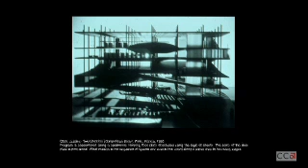So this is a series of speculations about the ways in which sheets open up disciplinary research that's both organizational and cosmetic. Sheets avoid the solid logics typically associated with mass. Unlike surfaces, sheets need not conform to the organizational constraints of a solid.

Figure-ground relationships emerge from solid logics, while sheets distribute events across a field rather than adjacent to or across a threshold. So I have two figures here. One is the Jussieu Library competition by OMA, where programs are distributed using the logic of sheets, and an interior kind of urban environment is made.

The edge of the floor plate in this case is provisional. What matters instead is the sequence of events that unroll along the sheet's length.

This is in contrast to their competition entry from '89 for the Très Grande Bibliothèque, where the entire mass of the project is understood as a solid. Quite literally, it's a series of stacks, and the programmatic elements are carved figures that produce voids that float in the stacks. Sheet logics unseat figure-ground as the chief organizing principle of planning and massing.

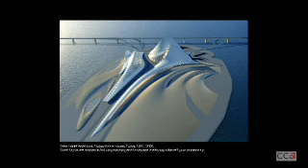Figuration emerges across a field and at scales both small and large. Figure-figure and ground-ground relationships are possible. Here's an early rendering of the Dubai Opera House by Zaha Hadid.

The fundamental design concerns of massing are part of early sheet production rather than emerging from the conventions of material assembly. So formal questions associated with massing require novel approaches. That means the relationship of a mass to the ground, its terminations, its corner conditions, etc.

These tropes have been developed for solid logics, and they provide insufficient solutions to questions of how a sheet might meet the sky, meet the ground, etc. Other questions of sheet description—at apertures, changes in orientation, or changes in material—are also left unanswered by convention.

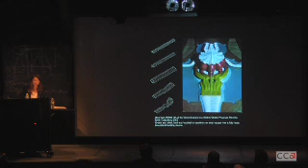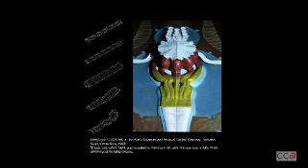This is a project by Greg Lynn, Ark of the World Museum, where he uses a series of sheets that are rolled up to produce a variety of spatial types—sort of covered exterior space rendered as canopy, niche-like space that produces a series of peripheral galleries, as well as the entire building mass.

Minor operations have major formal repercussions. The ease with which operations produce sheet behavior allows the study of versions. Versions are related families of design work that allow differences and similarities of each operation to be evaluated and built upon.

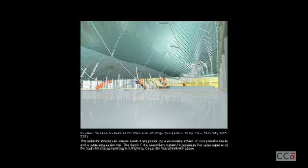Sheets require tectonic inventiveness. This is an old Gnuform project for the Queens Museum of Art expansion strategy. So sheets, rather than developing a spatial diagram with a tectonic solution, basically distribute material in space, and the tectonics have to be evaluated on a local scale.

Rather than producing abstract ordered fields of geometry that downplay materiality, sheets provide form-active tectonic potential without reducing the solution to a single structural system. This allows secondary systems to step in as sheets require them.

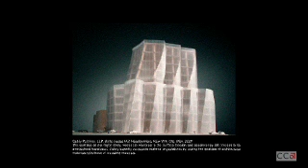Sheets confound material expectations. They imbue surfaces with material qualities rarely associated with architectural production. Surfaces are rendered material rather than abstract. Sheets exhibit posture, which results from their material behaviors. Sheets may drape, recline, billow, etc., depending on their weight and material properties.

This is an example of a model by Gehry Partners. The IAC headquarters was modeled in a series of materials—this one is mylar; there were mirrored mylar studies. You can see in later translations of the architectural model to the physical construction the way in which qualities from the model migrate into the full-scale product.

Sheets encourage the commingling of the representational and the material. Sheets are the primary site of digital description. They operate as the backgrounds of drawings, the primary visual material in three-dimensional modelers, and the products of numerically controlled machines. The commingling of the representational and the material allows the synthetic to alter the real.

When digital information inhabits physical environments, the mixture can produce a new set of synthetic qualities. This is the actual translation of that earlier Mylar model in the IAC building in New York.

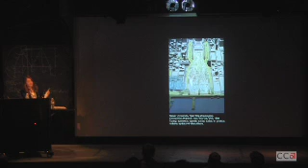Scissors can have their way with sheets. This is Reiser Umemoto's West Side competition, where sheets were manipulated using cutting operations at a variety of scales. At fine scales, cutting alters sheet materiality using techniques like perforation and striation. At medium scales, cutting manipulates profile and silhouette, and at large scales, cutting produces particular sheet boundaries that deal with urban or local site conditions.

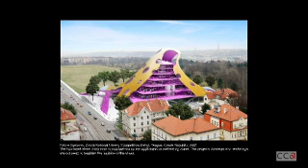Sheets are sided. This is a competition entry by Future Systems for the Czech National Library. Unlike solids that are conceptualized as of the same medium throughout, sheets have sides. This sidedness may be exploited to condition different atmospheres around it. This is often choreographed by the application of graphic material.

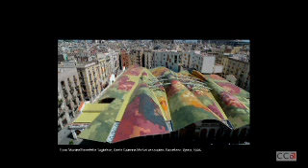Graphic material readily adheres to sheets. Cosmetic effects are possible when deploying sheet logics. Graphic material, including color, texture, pattern, and imagery, is easily introduced to sheets using a variety of technologies.

Sheets expand the expressive and performative capacity of seams. Rather than reluctantly accepting seams as a byproduct of assembly constraints, sheets foreground the capacity of seams to perform at larger scales. Seams can radically alter silhouette using techniques borrowed from something like garment construction, which I'll talk about a little bit later. Seams can tightly tailor sheets with careful pattern making techniques or expand them using additional inserted material. Seams therefore manage and distribute surface area in highly particular and controlled ways.

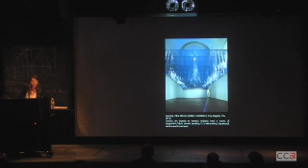So now I'm going to show you a few projects, both from practice and teaching, which have been working within this framework of sheet logics to greater and lesser degrees. We'll start with practice.

So this is a project I'm going to show you, a project that's under construction in Malibu. It's called the Vortex House.

The site is 1,000 feet above the PCH with 200-degree views of the ocean, and it's being developed as a rebuild project, a disaster rebuild project. So the site is extraordinarily difficult to economically develop at this time, but there was a house on the site previously.

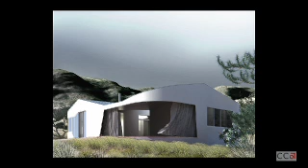The project is a 5-sided mass that's developed underneath a sculptural roof plane. So the sheet in this case is the plane of the roof that you see, the center of which is a courtyard. And to the south, which is down, is the 200-degree view of the ocean.

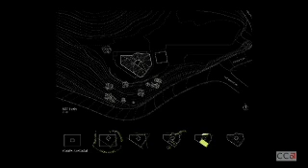To the north is the continued rise in topography to the ridgeline. So the project's ambition lies in its dramatic spatial modulation and the saturation of its interior with the visual and geometric material of the surrounding site, rather than understanding the views as a way to release the interior to the exterior. The surrounding geometric and topographic features are drawn into the interior to condition its atmosphere.

Artificial and natural geometries are characterized as of the same fluid medium, and the house a vortex into which the material is drawn.

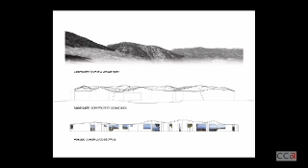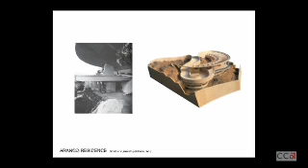In the Arango house, you arrive at the top level. There's an exterior entertaining terrace on the upper level, and underneath that terrace, the private quarters of the house are kind of nestled into the house. So the view is captured through a canopy above, and the living space, the formal conditioned living space, is underneath. And the house basically produces a picture window, a panoramic picture window of the coastline.

In this project, there's actually a desire to fuse the space of the Arango canopy and the private spaces into one environment.

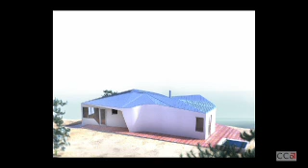So you can see here, this is a view from the northeast, kind of above. This is a false digital rendering. The ocean's not nearly as close.

You enter along the upper right of the screen, and there's one place where the roof extends beyond the perimeter of the house, and you move into the house underneath the sculptural roof plane. Every room is given at least 2 faces of exposure to the surrounding landscape, which means that every room feels a little bit like a pavilion underneath the canopy and set into the landscape.

And then to the south here is a covered patio, which is permissible space. It extends the living space, and it's a kind of inclusion in the overall mass of the project.

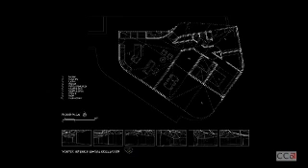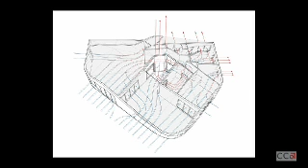There are many ways in which the courtyard works to kind of act literally as a vortex. There's a lot of natural daylighting or natural ventilation strategies which are illustrated here, but the courtyard also does a lot to produce more views of the landscape beyond than just that which you can capture on the exterior envelope. So these are some of the exterior envelope views.

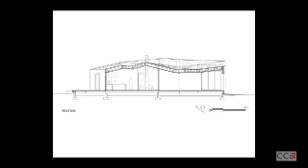And this is a section which shows the way in which the space on the interior is open to the plane of the roof. So the ceilings are always moving to meet the roof, and every room has kind of multiple focus points and also a variable ceiling height.

And all of this is achieved by basically a hybrid steel frame and timber construction, so that all of the dead load of the house is taken through the steel frame, and all of the shear is managed by the wood framing.

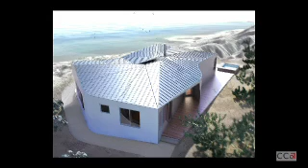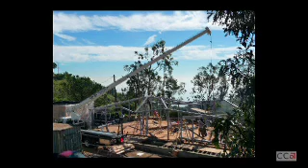So I'm just going to go through quickly to show you some of the construction images. We're just about 2 months from the completion of construction. I have a series of sort of ratty images of the construction site, but you can get a sense of the environment in which the house is located.

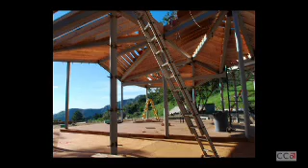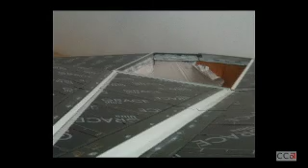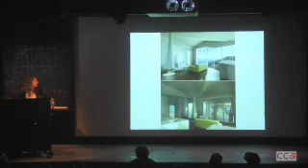This is one of the views that kind of looks like an interior rendering on the top there. And this is the ceiling plane coming together. You can see it extending out into the patio.

And there's one location here where the geometry of the sheet is not idealized for the distribution of load to the perimeter of the building. And so there's this one beam that kind of slips out underneath the ceiling plane and basically transfers load that accumulates at this high point above the living room.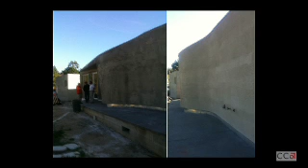And right now, this is the kind of pre-finish coat for the stucco. The roof is zinc. A lot of the edges are really crisp and sharp. And the roof is managing rainwater. It's also dealing with the structural load, and then it's rising and falling to manipulate the space on the interior.

So in terms of what the courtyard does, once you walk in, you have a view toward the courtyard, and you can see through the courtyard out into the ocean. And then when you turn back around, you walk to the bedrooms in the house, and you move around the courtyard. So this is a very tiny house, so the spaces of the house are not nearly as compressed because you have a series of views to the landscape through that courtyard.

And then when you arrive at the master bedroom, then you have another view of the ocean and a view back to the living room to the right.

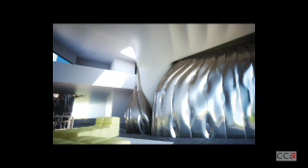The next house I want to show, which will go more quickly than that one, is called the Succulent House. This house was designed as a design proposition for a book called Making a Case, recently published by 306090, and the editors asked a series of architects to produce a design project or writing responding to a contemporary crisis in the American house or American housing.

Our proposal addressed what we called the crisis of identity, and we made the following argument.

The contemporary American house is experiencing a deepening crisis of identity in this era of growing environmentalism. This identity crisis began nearly 50 years ago with the end of the case study house program and the rapid acceleration of suburbanization. The discipline of architecture never regained its footing in the context of American housing, as housing became a product subject to the efficiencies and economics of mass manufacture.

The impact of suburban sprawl on energy, water, and transportation infrastructure was largely overlooked until its geographic consequences were firmly in place. The widespread growth of environmentalism has done little to assert a new identity for the American house.

Whether produced individually or en masse, the American house remains a mixture of old forms, updated equipment, and engineered building products that mimic long-abandoned methods of construction and long-discarded lifestyles. This critique applies as much to the tract home as to the dwell-modern, mid-century remix. Neither solution comprehensively addresses changing societal values or contributes significantly to contemporary design culture.

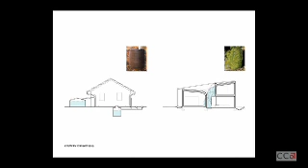We believe growing environmentalism should be met with design ingenuity, not product specification. A lasting contribution to sustainable development or the discipline is impossible when underperforming architectural and urban organizations are simply reproduced using green-branded products. So our proposal addresses the pressing global issue of fresh water quality and supply as but one possible force to drive design ingenuity and improve environmental performance.

Ultimately, this approach allows us to speculate on the organizational, spatial, and atmospheric potential of water collection on the American house. It was our hope that by doing analysis of rainwater cycles, gray water potential, and the storage of water for use in gray water systems, we would be able to produce a prototypical house that could be reworked in different climates in America.

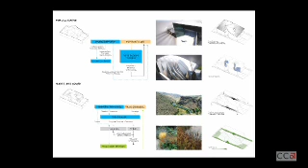Ultimately, we only did one. We collected a lot of data, but we designed one project for LA, and the house is what you'll see now, called the Succulent House. It's sited on a prototypical urban parcel of 50 by 110 feet. This is a common lot size in LA and in other cities, especially in the inner beltways.

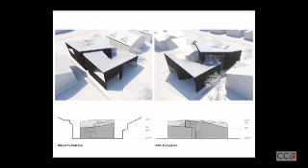We selected this site because we anticipate continuing trends toward inner beltway reurbanization. Organizationally, the roof area of the house is divided in two, and its area maximized for water collection, storage, and distribution.

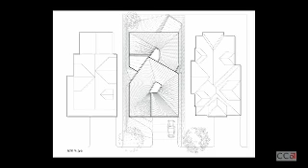The roof planes are inverted, and they collect water at their centers. The program of the house is distributed around those cores. In the back, we have a winter garden, which is adjacent to a master bedroom and kitchen.

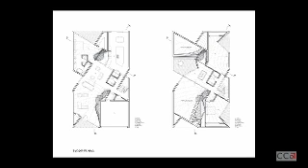In the front, at the living room and family room, we have rainwater storage bladders that are wrapped by a bedroom above and living space below. This is what these look like in section.

The bladders are heat-welded vinyl bladders, which expand as water is stored. So when you have rainwater, like its namesake plant, the bladders exhibit succulence in times of increased water supply. In times of low supply, the bladders are loose and drapery-like.

These are some of the images of the interior.

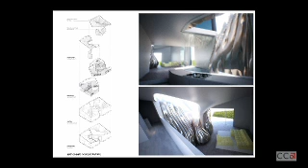Someone called to ask if they could tour the house, but since you're all architects, you know that wouldn't be possible.

This project is called Ultramarine. It was commissioned by the executive director of the Lace Gallery, a contemporary art exhibition space in the heart of Hollywood. The challenge to me was to transform the main gallery space into a public plaza for summer programming. The gallery is located right on Hollywood Boulevard, right along the Hollywood Walk of Fame.

Ultramarine is an immersive environment of iridescent color, a massive cloud of delicate undulations. The title refers both to the color of the piece and to its meaning beyond the sea. The installation produces the physical sensation one feels when gazing at a cool body of water. Like the sea, its surface appears to be in a constant state of flux as the fabric curls and drapes in unexpected ways.

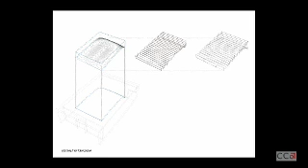Conceptually, ultramarine produces an abstracted synthetic vision of the Southern California landscape. It is at once the clear blue sky, the shimmering rhythmic surface of the sea, and a deep, glistening swimming pool, all of which were the things that I thought were shared public experiences in Los Angeles.

The piece was conceived of digitally but produced manually using dressmaking techniques to alter the lengths of the top and bottom of a series of fabric sheets. Long sheets of contoured fabric were darted and stitched to choreograph both the general underbelly of the piece as well as its local flounce. Detailed studies of the line work and surface manipulations inspired the design approach and helped calibrate the effects to the desired scale, transforming the empty room into an environment saturated with color and movement.

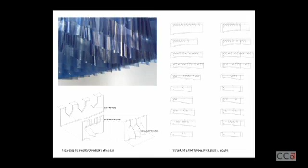We did all of this with analog techniques because it was inexpensive and fast. So our only digital assistance was that of the digital model and large-scale plotters. But other than that, we were like five dressmakers lying on the gallery floor putting this together.

This is a competition that we did in the office last summer. It's a competition that we worked on following a series of studios at UCLA that I called Fabric Fantasies. Essentially the students were working with swatches of fabric, applying dressmaking techniques, and slowly producing figuration across fabric surfaces. Using some of what we learned in that studio, we produced this competition entry for the New Taipei City Museum of Art.

You can see here that we did a series of diagrams that were our underlying geometric logic for the project. We had a series of cubic masses that we wrapped with surface, and those surfaces could be manipulated in the following ways: they were subdivided, pushed in, pulled out, sliced, flipped up, or joined.

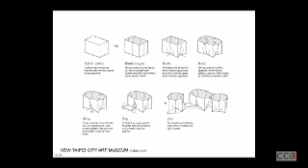One of the reasons why we wanted to assign a logic of parts to the project is because it was quite a large project with many different types of programmatic centers, from a children's museum to the Contemporary Art Museum to a research library and other things.

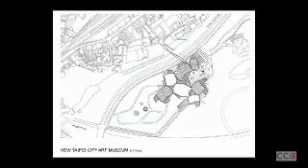To the north on this particular site plan is the city fabric of New Taipei City. To the south is a river, and this is essentially a floodplain that they are attempting to develop with a series of cultural attractions. So they have a ceramic park, and they're developing this contemporary art museum.

So we used the surfaces of the different constituent parts of the project to extend the kind of spatial types that we could get at the first and second levels of the museum, and then we allowed more standard large plates of gallery to stack up above that. But what it allows us to do is really manipulate the main entry level, the level just above that, and the relationship of the building to the landscape.

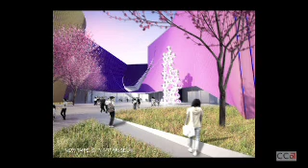There's a large, busy multi-lane road that rides right by the site, so we're able to berm and use the surface of the building to block noise and sound and views from the exterior, while at the interior we produce this art plaza where the lobby, restaurants, stores, and bookstores are located along this level.

In the middle of this image you see the way the cloak of the scheme lifts up and touches another area of surface on the other side, giving us a column-free space where we're able to push all the structural components to the exterior of the project and open up the lowest level of the building in between the building masses. This is just a simple program diagram.

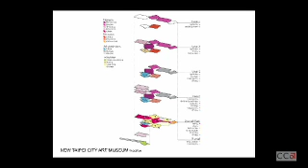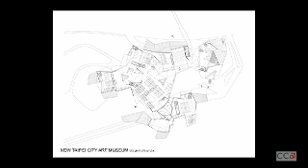The sheets were also helpful in organizing vehicular traffic and light rail, which were also part of the competition brief. So this is the ground level of the scheme. The rail line comes in at the bottom, the art plaza is in the middle toward the right, and the extended surfaces that berm into the landscape make space for large footprint parts of the program, like an auditorium. All the loading, restaurant, and lobby is right in the center of the image.

This is the first floor plan above, so you can start to see the way the surfaces are being slid and pulled off of the mass. And then the plans just keep going to the top, with the surfaces getting more taut as you make your way up.

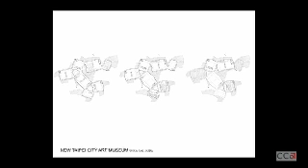One of our desires for the project was to introduce color through the use of a two-sided ceramic panel, a glazed ceramic panel that has lenticular effects. So as you move relative to the surface, it will change colors as you see more of one edge than another.

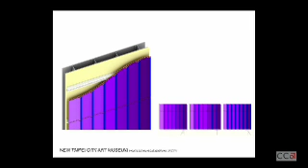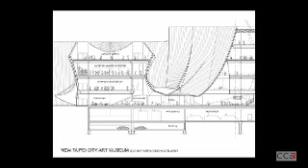This is just a detail of what's happening there. And then interior renderings. On the right is the lobby space looking back toward the art plaza. And here is a second floor escalator, which is making its way back down to the gallery.

So I'm just going to show you one more thing. Actually, I'll show you something kind of new. This will be the last thing.

Over the past few years in tech seminar teaching, I have been trying to work out a little bit what the value of excessive digital information being layered onto surfaces might be, and have written a little bit about it.

And these are some images that are kind of uniquely from Southern California industry, namely the entertainment industry, toy industry, and we also have automotive and aerospace industries. So this image is just kind of a stand-in to show the way in which, with digital tools, you're able to hybridize different feature sets to produce new environments.

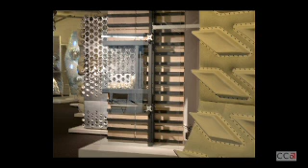So I was going to show you two of those. To the very right of this image is one project that I found really interesting. It basically hybridizes pan-formed concrete systems and fabric-formed concrete systems into a hybrid system.

So the cells, all the pans are identical, and the students developed a kind of malleable gasket in between those pans that would allow them to produce large precast panels of varying shapes. So this is a sample of one of those, and it allows them to basically get undulation across the facade because they can, using the economy of the pan, still produce unique parts across the assembly system.

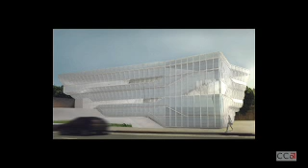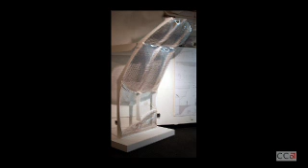And then this is a rendering, a kind of schematic rendering of a series of students who thermoformed acrylic and did a kind of double skin acrylic system, and also applied a kind of graphic treatment to manage light for this new facade for a community center in LA.